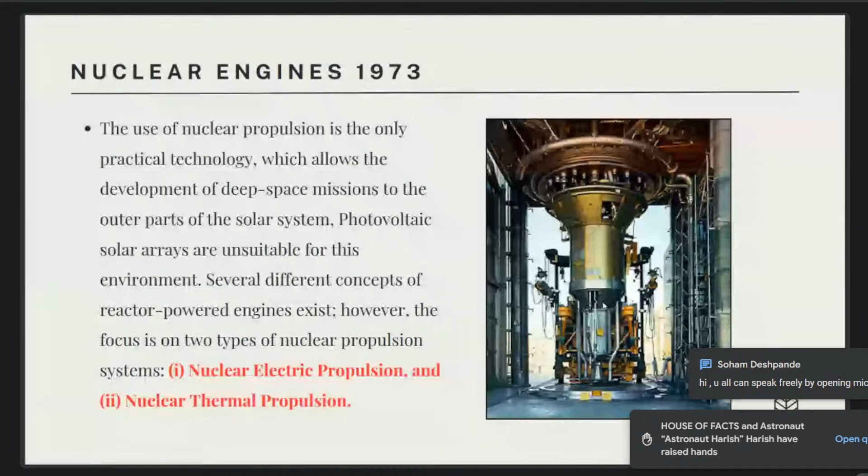So yeah, those are the basic fuels that even rocket engines will also be using, if they are going to come in far ahead. Okay, so basically they will be splitting with the help of a neutron, which is going to add up, and it will be uncontrolled if it is not controlled, or else if it is controlled, we'll be having a controlled sustained chain reaction. Okay, so that's how things will be working. Fine. So I hope things are okay till now.

Yeah, nuclear engines. Sir, one doubt. Yeah. Sir, what if we apply two concepts together, like having heat energy from a nuclear fission or fusion reaction, and then add hydrogen fuel cells, so that we have very low cost, and by interacting with hydrogen fuel cells it will gain so much kinetic energy that we can use it for propulsion also at low cost? Yes, definitely we can do it. But is there any problem in that, sir?

Yeah. The idea is very good. Combining the concepts of hydrogen and nuclear, and producing a lot of kinetic energy, so that you'll get a lot of push and thrust. Yeah, that's a well and good concept. But the thing is, see, whenever you are thinking of an engineering concept, especially thermomechanical or thermoelectrical, where thermal properties come in, kinetic energy comes to a working fluid, right? Second thing is kinetic energy also comes to the material science.

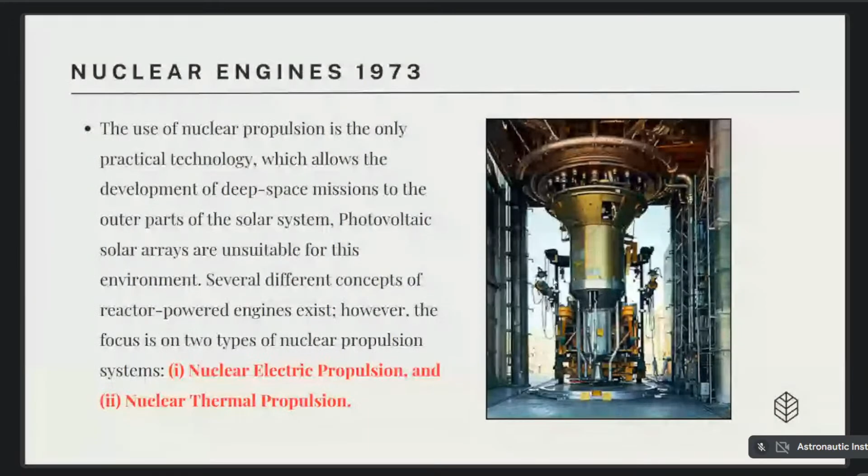So any other questions, guys? Any doubts? Okay. Fine then, we can move ahead. Coming to the next topic. I hope my slide is clear to everyone.

This is called a self-eating propulsion system. We had this concept, basically a theoretical concept, around the 1960s and 1970s. It's not a new concept, it's an old one. Basically it's an engine that is consuming itself, and giving the thrust out of it. So the rocket is getting consumed on its own and giving thrust, just like a candle.

In a candle we get the flame, and the candle is also reducing its sides, getting vaporized, and giving the flame. Here we are getting the thrust, and the size of the rocket is also getting reduced. So that is the interesting concept here.

But the practical aspect of this is, whenever the rocket size is getting reduced on its own, the working fluid, basically the high energy gas particles, are coming out of the combustion chamber of the rocket. Here you can see one of the practical models that's been tested recently, with the scale they have measured, how the length is getting reduced and the thrust is coming out.

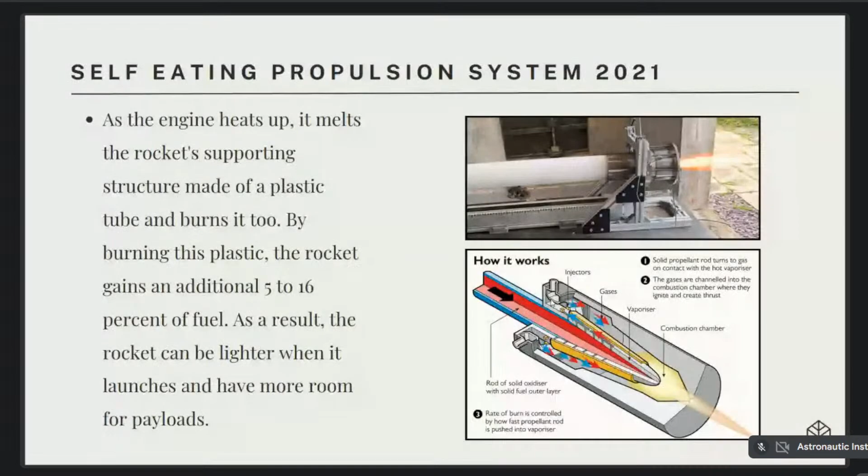Okay, fine then. So we will move into the next concept.

So I have mentioned the heading called propulsion using detonation. First of all, what is combustion, guys? How does a rocket engine work? Any idea? How does a rocket engine work internally? It's totally okay if you don't know, guys. Please, if you know, try to open up and speak up.

Just like if we talk about combustions, many of the reactions, if they are exothermic, then they will provide us energy, which we can use for propulsion. The basic idea is about that. Yes. So if there is any amount of combustion, and if there is an exothermic reaction, and we are getting the heat coming out, we'll be getting kinetic energy, and fluids coming out at a higher velocity, which can be thrown out from a convergent divergent nozzle. Okay, fine.

Now we have some idea on combustion. In rocketry there is a separate subject called combustion physics and combustion chemistry, guys, which is one of the hearts of the propulsion system, I would say, because it's not taught in any of the intermediate colleges or in BTech. I don't know if anybody has joined from MSc chemical or chemistry sciences, or from any physical sciences. But it is a separate topic under master's in engineering, called combustion study and combustion instability analysis. It's a huge topic.

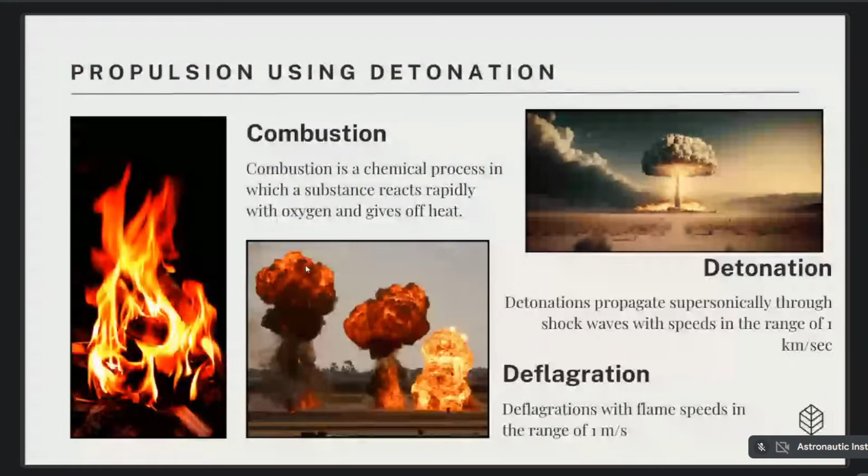Okay, so NASA had this problem of detonation wherein shock waves developed inside the combustion chamber of the F1 rocket engine. Because of that, the combustion chamber used to peel out like a banana leaf. You can see it here. This is one of the tests they had done, and they recovered and kept the combustion chamber of the F1 rocket engine over here. You can see how the engine has been peeled off, and this is the fuel injector of the F1 rocket engine.

Whenever the fuel used to get injected through this showerhead fuel injector, the ignition used to take place at a particular point. Suppose it's taking place at this point, it used to travel down in circular waves, and we used to get a rotating detonation at a particular point, and at that point the engine used to break apart and peel apart like this. The material was not able to sustain those temperatures.

To overcome that, they have added these baffle plates - these horizontal structures and these circular structures you see. These are basically the baffle plates, built by NASA on their fuel injectors to reduce the combustion instabilities and these detonations - rotating detonation, I would say.

The history of this started long back in the late 1950s, and in 1998 NASA had this idea, saying that detonation is actually producing a lot more - basically 25% more efficient combustion - considering their deflagration engines. They wanted to nail it, and bring out an engine that can actually work on completely detonating the fuel in a controlled way.

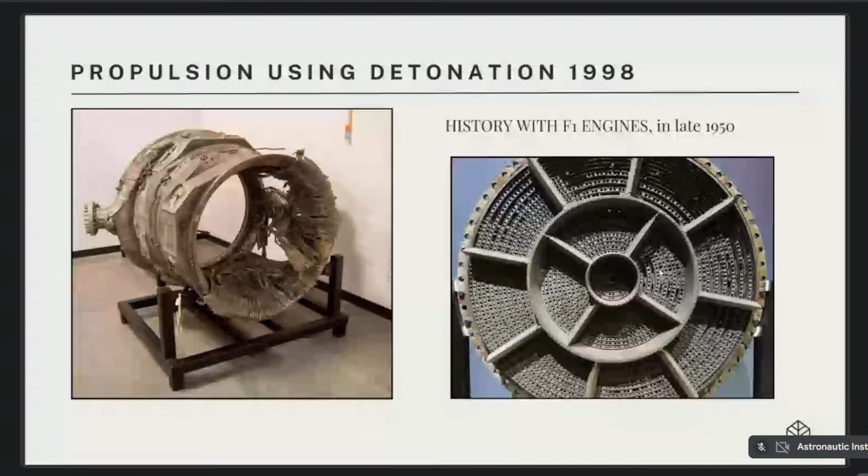They wanted to do it somehow, but they were unsuccessful until recently, when one such development happened in the pulse detonation engine. This is a noisy engine basically, wherein we are having detonation waves coming out in the form of pulses, not a continuous detonation. It's like the sound will be like a Royal Enfield engine, with much more loud noises and much more pressure waves coming out.

You can see, because of one of the tests that's been conducted, the entire engine is getting heated up to red hot, wherein the fuel and oxidizer have been mixed and detonated just like the internal combustion engine, and the pressure wave has been released in a periodic wave.

Basically we used to have some frequency - we need a controlled frequency that controls this pulsed detonation, and we need to make sure that frequency does not interact with any of the material's natural frequency, otherwise it will lead to resonance and instability of the structure as well.

That was one of the problems with the pulse detonation engine, but it's been successfully developed, though not currently in use with rocketry. They are used in some smaller aircraft, or UAVs - unmanned aerial vehicles - where they have been successfully working, but not much popular in recent generations. There is a lot of R&D going on with some startups and scientists in India, trying to develop UAVs using pulse detonation engines as well. But the history goes back to 1998 and the 1950s.

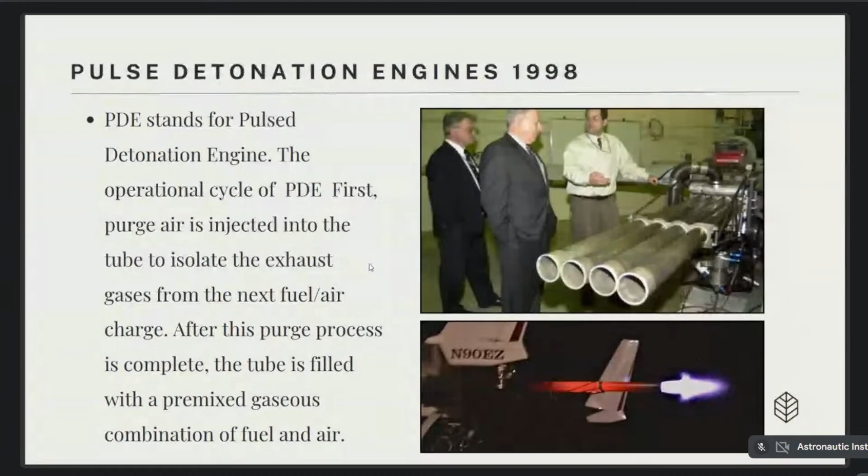So here we had pulse detonation. I said that it is in the form of frequencies coming out - the detonation wave is in the form of frequency, in the form of time intervals. I would consider, suppose per second once or twice a second, something like a bullet engine sound. But if you want to have a continuous detonation, that will be a very powerful engine considering this pulse detonation engine. So these are some of the concepts of continuous detonation engine.

I would like to speak about this as well. If anybody is familiar with fluid mechanics, you should be familiar with oblique shock waves - oblique shock waves, bow shock, normal shocks. Basically, whenever the detonation happens, I told you things will go supersonic. Whenever things go supersonic, even in aircraft dynamics or aerodynamics, you might have studied that whenever a wave or an aircraft or an object going at supersonic speed will be having oblique shock waves.

When we are having an oblique shock wave, there will be a huge amount of pressure changes, temperature changes, and high temperature with exothermic reactions happening at that particular point. Because of those high temperatures achieved at the oblique shock wave, we can easily detonate or ignite the fuel oxidizer mixture at that point of oblique shock wave formation, because there will be huge amount of exothermic reaction and thermodynamic reactions happening. So that's the reason we can easily ignite the fuel oxidizer mixture.

Such kind of engines are known as oblique detonation wave engines. Yet this oblique detonation wave engine is just a theoretical study. It says that if a sustainable oblique detonation wave is constantly produced inside a combustion chamber, then continuously adding the fuel oxidizer mixture will actually detonate continuously, so you get a continuous detonation engine as a propulsion system for any rocket. That's what it says. But to create this oblique detonation wave continuously is quite challenging, and that's where things are not getting practically right now.

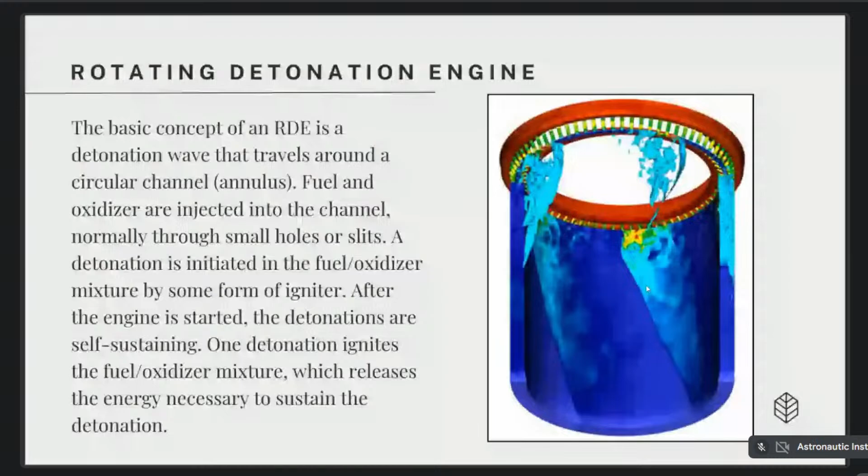I think that's it from my end for today. There are also some other engines that will be discussed with you guys in the coming webinars. Those are electrothermal propulsion systems, resistojet, induction thermal, RF electrothermal, microwave thermal thrusters, variable specific impulse magnetoplasma thrusters, magnetoplasmadynamic thrusters, arc jet thrusters, and bipropellant engines.

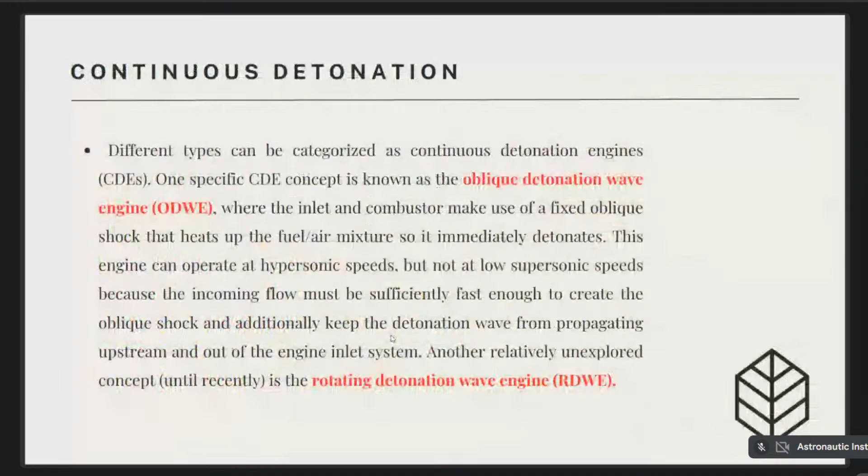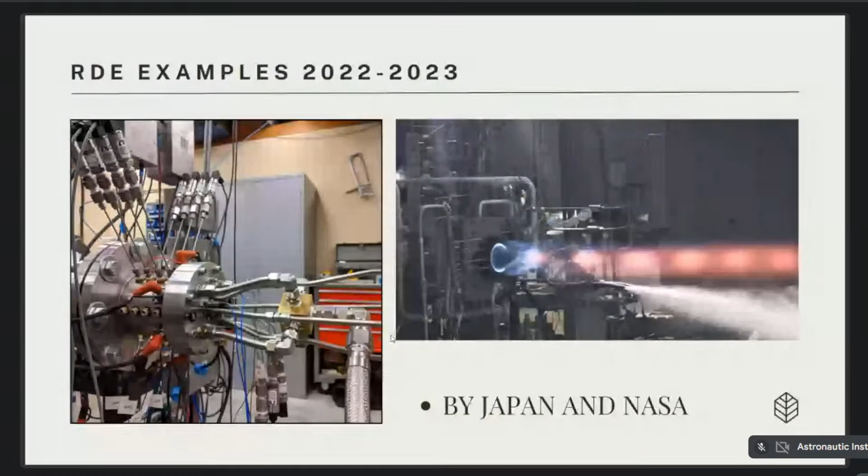But meantime today, because of time constraints and other stuff, this is the end of my session and my talk. So if there are any questions or doubts from you guys, please let me know. Let's have some discussion so that we can conclude the webinar and end it. Any questions, guys? Any doubts till now about what we had discussed?

So this is all about, you can consider, half of new age propulsion. And there is also one more engine I have put in at the end, basically one of the engines from a company called Launcher, which has tested their engine. The flame looks very good in here.

Any questions, guys? Any idea? Any doubts? Any new thoughts? No, sir. No doubt, sir. Okay, nice. Very good. Anybody?

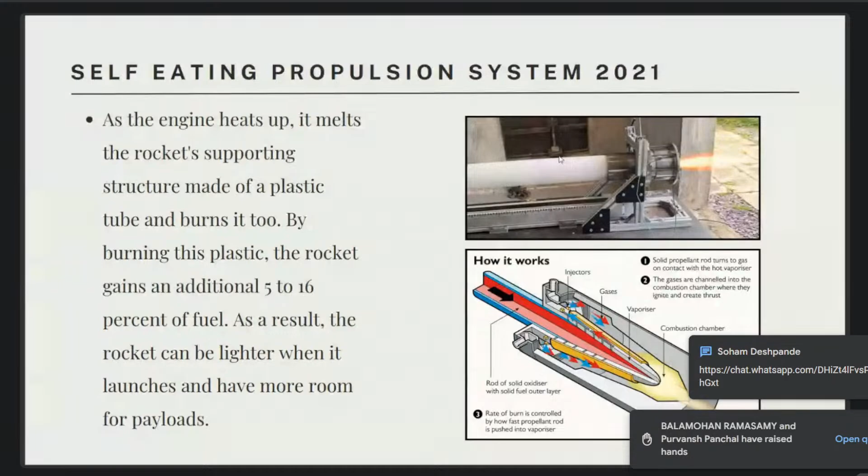Just a second, sir. I hope, ma'am, you have taken the screenshot of what you required, right? The self-eating propulsion system, sir. That is the second part. For self-eating propulsion part. Okay, you need that. Okay, here you go. Thank you, sir. It would be great if you share the PPT also. Sure, we'll do that. Thank you.